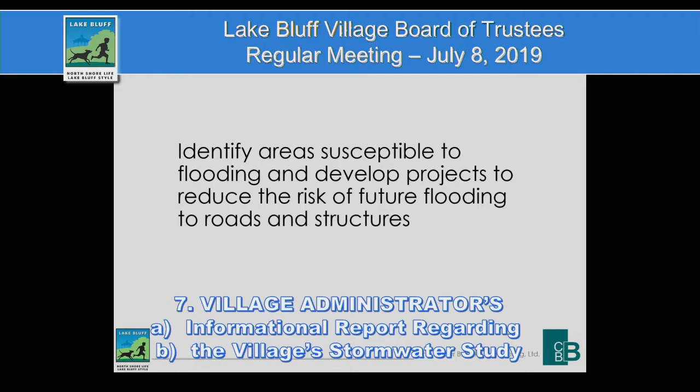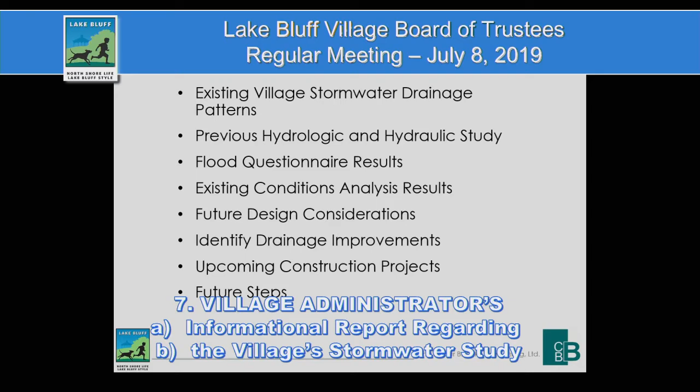So what I wanted to cover today was our existing village stormwater patterns, if you're not really familiar with how the water flows. I'm focusing mostly on the east part of town, from Green Bay Road to Lake Michigan. Here's a quick exhibit of our study area that we've been working on. The grayed out area in the bottom right corner shows our study area. The red hashed area shows what we've done in previous studies. I will be focusing from Green Bay Road to the east.

So in previous hydrologic and hydraulic studies that we've performed for the village, we sent out flood questionnaires to the residents and received pretty good feedback via the SurveyMonkey online website. Existing conditions analysis is what's driving what areas we're looking at within the village, and then how we're designing these study areas. The city has decent criteria that we like to follow and make sure that we're not causing problems and we're doing the best that we can to keep structures and roads clear. I'm going to identify a few drainage areas.

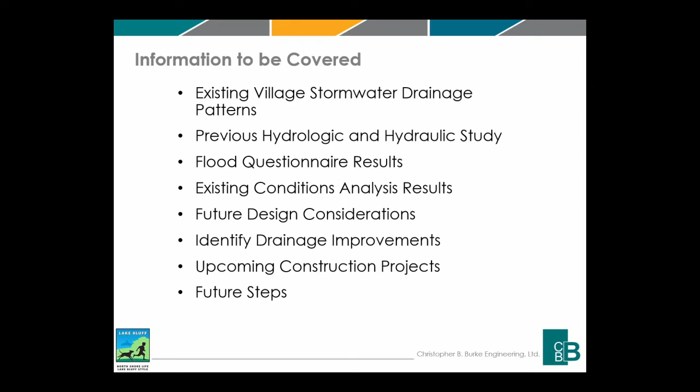In the future, I think we plan on coming back in September to discuss more specifics on the areas that we've pinpointed, and what kind of improvements and costs, and how we can decide what projects to move forward with. And then the village actually has a couple upcoming projects that are starting relatively soon. Within the next couple weeks, I believe, 2 stormwater projects that we're involved with are going to get constructed, and then what lies ahead for the future of the village-wide stormwater study.

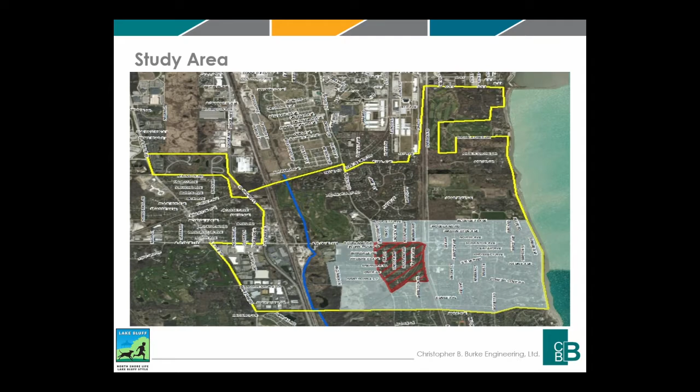So as I mentioned before, our study area focuses on the southeast corner of this map. We're covering from Green Bay Road east to the lake, south to the village boundary, and north to Blodgett Avenue. So here's a nice map that shows the existing drainage patterns. As you can see, the red is the high spot within the village, and the blues are the low spots.

So we actually are in a unique position. A subcontinental divide exists within our village, which is kind of neat. Everything that falls west of Green Bay Road will find its way directly to the Mississippi River. Everything that flows east will flow its way out towards the St. Lawrence waterway. So it's a neat little area from a hydraulic standpoint.

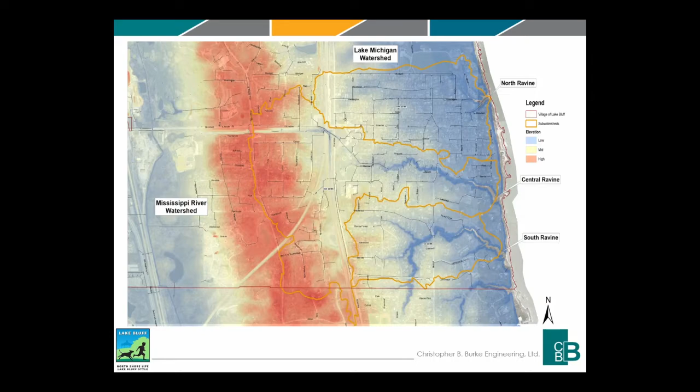What that analysis really helped us do was identify some future drainage improvements within the north and east terrace areas, which I'll touch on more. And I make a little note of it right below that, where we used that study to develop the Lincoln Avenue drainage improvement, West Sheridan Place improvements, and then that analysis has actually been expanded to include the village-wide study, so areas east of Sheridan Road towards the lake, and then south towards Bath and Tennis Club.

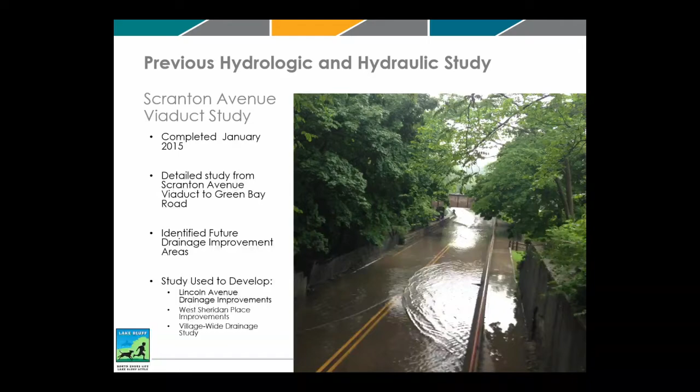So we sent out flood questionnaires to all of the residents. We put a link in the weekly newsletter. We put a link on the village website. The village mailed out information cards to residents to try and get responses. 329 responses were received, which is actually a pretty good showing. We've sent out to villages 6 times the size of this and received a quarter of the responses. So it's good to know that we're getting feedback. Really, the more information that we can get from the residents, the more knowledge we can gain.

I live in the community, and the number of times when it starts downpouring and I hop in my car and try and see the flooding, I can't even capture it all in one day. It happens so quick and it recedes relatively quickly, but usually by the time you get to a lot of spots, it's gone and there's nothing to really see.

So a couple questions that we asked, and we're really just trying to find information on, 1, the structure, and 2, what kind of flooding are you seeing and encountering? So about the structure, do you have a basement? Have you done anything as a residential flood control project, such as putting in overhead sewers to try and prevent sanitary backup? Do you have an exterior backflow preventer so the storm sewers can't surcharge back up into your floor drains? Relative questions like that were ones that we were asking.

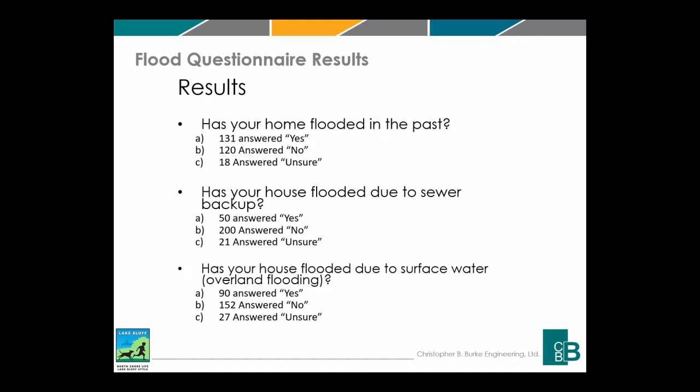So here's some of the responses that we got for homes flooded in the past. Almost 50% yes and 50% no. And then some of the questions on things that are happening outside the house. Is there a sewer backup that you're seeing? Is water coming in over land due to inefficient overland flow paths? Are you seeing ponding in the roadways? Is your road becoming impassable? Questions that help us, when we look at the overall village analysis, determine these pinch points, and confirm from the residents what they're seeing when it rains in excess.

So what we did was we created a survey response map. We were able to put together all of the responses in a GIS database and generate a map that shows where the problems are that we're seeing.

What's the kind of problems that we're seeing in those areas? And are these areas that we need to look at a little further? So here's the three main subbasins that kind of drain to the three ravines that go out to Lake Michigan. The North Ravine covers just a little south of Center Street up towards Blodgett. The Central Ravine actually has the largest watersheds, a couple hundred acres of tributary area, drains west to east. This is what is mainly tributary to the Viaduct before discharging under Artesian Park and into that ravine.

And then the South Ravine, which is I believe more of a newer developed area. They have the one South Ravine that picks up a portion from north of Lake Forest High School, drains up under Sheridan Road, and then kind of east towards the lake. So these are the three watersheds that we found based on the existing storm sewer systems that we were able to divide the community into.

So if you could see the black lines that are in the background, you probably saw it better on one of the earlier maps, and we'll see it again in the future. Those are some of the larger, what we call trunk lines. They're probably 15-inch minimum is what we picked up. There are smaller lines that drain through low spots, through no low spots, through rear yards that we didn't show on this exhibit, because if we did, it would just be kind of messy, to be honest with you. There would just be a lot to look at and probably cause some confusion.

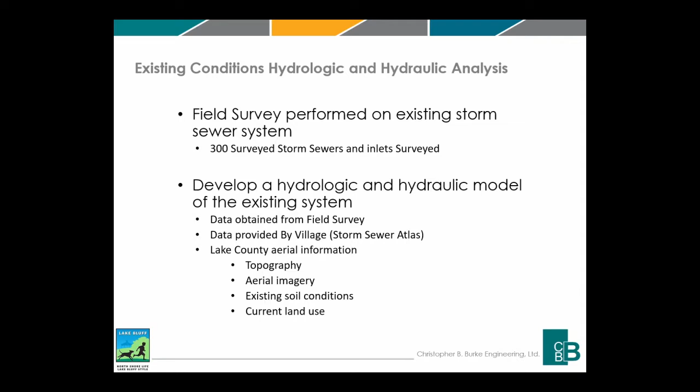So to give you an idea, we took those three subbasins and we broke them into 125 smaller subbasins. So this is what the skeleton of the hydraulic model looks like for the village. As you can see, a lot of the orange divides stayed consistent, the outfall stayed consistent, but what we were able to do by building such a large model is use more of a holistic approach to identifying any sort of problems within the area.

And then when we go and work on our alternatives, we're actually able to take a look and say, okay, if we fix this drainage issue in East Terrace, is now the viaduct going to have problems? Or are we now causing problems in the ravine by increasing storm water that's going there? So we're able to view it larger than if we just look at a smaller sample and say, yeah, this matches, we assume that there's nothing else. We wanted a better idea, and it's actually a way to feel more comfortable with what's going on and what alternatives we are proposing.

What's really nice about this is we are actually able to run our design storms from the Illinois State Water Survey. They provide us with these rainfall depths that we use to analyze, and then we're actually able to run various storm events that we see. So say for example the July 2017 event, I know it happened a couple years ago, but the event's probably still pretty fresh with a lot of people because that was probably record flooding throughout the county.

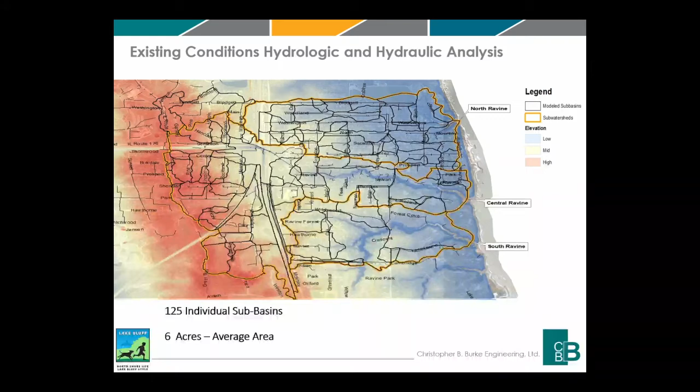But if you look over towards the East Terrace area, you're going to see smaller subbasins divided usually by roads, front and rear yards on how water divides. And that's how we were able to determine these divides, based on the Lake County aerial topography that we were provided with.

So what did we learn? We basically learned what we see in a lot of these communities in the area. This village was developed prior to modern stormwater planning. Lake County's ordinance didn't really come into effect and start taking off until 1992, and by that point, a lot of the village had been developed, obviously. So there's actually various levels of protection for the existing system.

So taking a quick look at things, the viaduct is going to flood if you have a real heavy rainfall that exceeds the 1-year rainfall event. That's just how low it is; there's inadequate drainage from it. There's a lot of area that drains towards it, and it's very flashy.

In the East Terrace, you can go into some of those areas, and some of the storm sewer systems will provide less than the 5-year. There are some larger ones, and based on design storms and what we use to determine those numbers, there's a little bit more protection. But then you can go to areas east of Sheridan Road and within the northeast portion of the community, and you see that there's almost the 10-year level of protection. So it's not consistent throughout the community, which is very common for communities that were developed in the past.

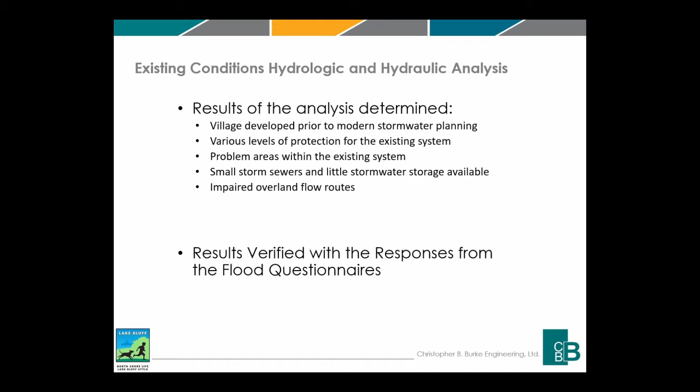From our results, we're also able to determine what problem areas we're seeing, and what is causing those problems. Is it inadequate storm sewer? Is it an impaired overland flow path, where if this shed wasn't built in this backyard, would water be flowing freely? If this fence wasn't put up and blocking water, would we still be seeing these issues? So we're actually able to see that. Then we were able to take the results of our analysis and compare them to the results from the flood questionnaires and the feedback we were receiving.

So here's a quick image showing our 10-year rainfall event and our 100-year rainfall event in the areas that we were seeing as flooded within the community. The blue is our 10-year, our red is our 100-year. Ideally, our goal is to get rid of as much of that 10-year sitting on the roadway as possible. You can see it prevails mostly in the East Terrace area. But there are some wetland areas that we're not going to try and fix, because they're supposed to take water. They're supposed to be those natural depression areas.

And you can also see more along Prospect on the east side of town, where we're seeing some 10-year within the roadway. So this helped us identify different areas within the community that we should take a closer look at. And everybody knows the viaduct problem. You can see blue and red through there pretty clearly.

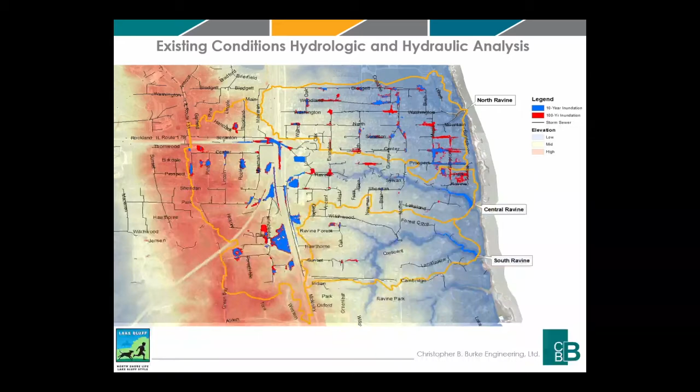There was some sump pump failure, so that was kind of an isolated event. But you're able to identify where you're hearing from these residents and what we're able to see. So it shows that our results are going in the right direction, and we feel comfortable designing alternatives to improve these areas based on the results of our analysis.

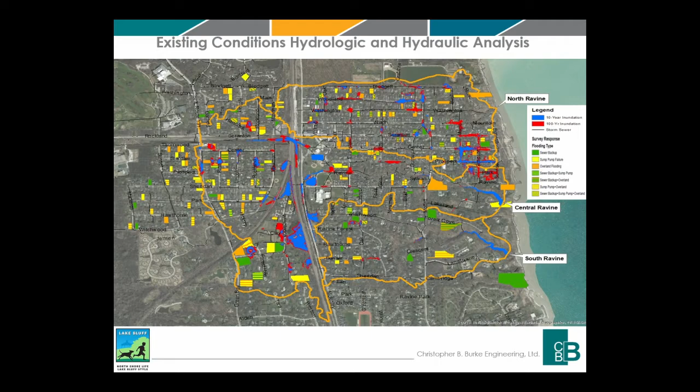So what are we really looking to do then? Our future design considerations, as I touched on earlier: the village has some design requirements that I think are really good for what we have. Like I said, limited area for the construction of storage basins. What the village likes to do is keep 10-year rainfall events off the road and 100-year rainfall events away from the structures. A 10-year rainfall event is a 10% occurrence chance each year.

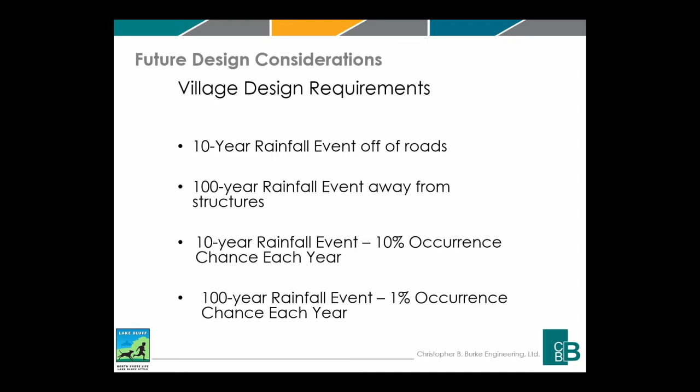We've had about 4 100-year storms in the last 3 years. Believe it or not, there's only supposed to be a 1% chance of that happening in a given year. So we're seeing it more frequently, which is leading to this, and this is what we're considering when working on the proposed conditions and our alternatives.

The Illinois State Water Survey, based out of Champaign, Illinois, analyzes and re-looks at rainfall depths after so many years. They've been hearing from a lot of communities and regulators saying your rainfall depths aren't really aligning with what we're seeing. So those depths are currently being updated.

We're now going to start seeing a skew where, currently within Lake County, a 10-year, 2-hour rainfall event is 2.25 inches. What they're looking to increase it to is 2.99 inches, about a 30% increase. If you look at where 2.99 falls right now, that actually falls between the 25 and 50-year rainfall event. So that gives you an idea of the level of protection and the skew happening with rainfall depths.

Communities, regulators, and engineers need to adapt and design for some of these future increases, because what's the point of putting a project in the ground right now, designing for standards that are going to be outdated in a couple months?

The 100-year, 2-hour rainfall in Lake County is 3.77 inches, and it's moving up to 4.97. I didn't even have that number on my chart, so I couldn't tell you exactly what that falls to, but it's well over the 100-year, probably not far off from the 250 to 500-year range. So that's the kind of skewing we're seeing.

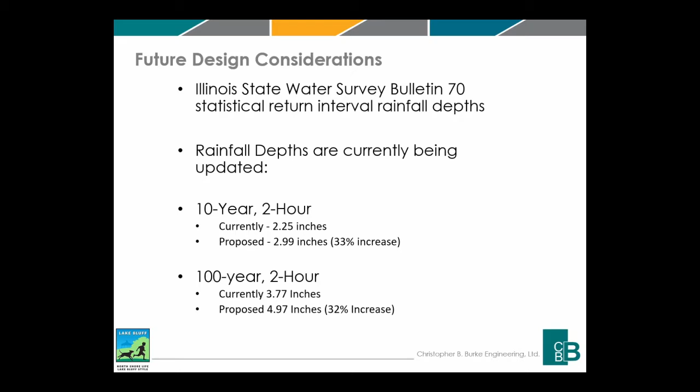Our potential drainage improvements are based on the results of the analysis, developed and analyzed at a conceptual level right now. When we get more into the design and planning phase, we'll take more site-specific survey and refine our modeling based on what we shoot out there with a field crew. That's when we prepare plans, and when looking at all our future concepts we'll start using the new rainfall depths. Like I said, we want to be progressive and make sure this stormwater system functions for years to come, not just for the time being.

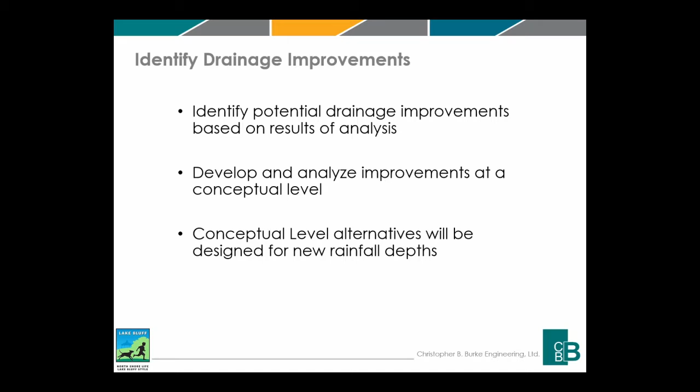Based on our results, similar to the map I showed you earlier, we were able to identify 6 different study areas. Study area 1 is over in the East Terrace. Study area 2 is down near Ravine Forest. Study area 3 is over on the east part of town. Study areas 4 and 5 involve the viaduct, and we're looking at a couple different alignments on how to drain it.

That really comes down to constructability, cost, and minimizing impact. Study area 6 is the area in the north center, where we're looking at constructing more of a relief sewer through that area to try to keep the roads clear and keep structures free from damage.

Here's how we're going to look at some of these alternatives. We're going to analyze using the XP-SWMM model, the stormwater management model, and look at both conveyance improvements and, if possible, storage improvements. If there's land we may look into doing it, but a lot of the land doesn't provide the volume necessary to offset the storage that would be needed.

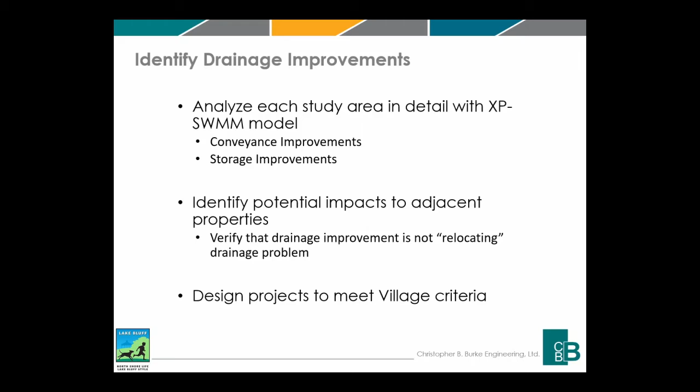We're going to identify potential impacts to adjacent properties, like I mentioned earlier. By looking at it through a whole village-wide study, we want to make sure we're not moving the problem on Pine to Rockland, or moving the problem on Rockland to the Viaduct. By looking at it from a village-wide analysis, we're able to see if we're causing problems somewhere else.

Are we creating a new problem that we wouldn't have known in the past? And then, as I mentioned before, a lot of these projects are going to be designed to meet the village criteria of 10-year off the road and 100-year away from structures.

I wanted to touch on a couple upcoming projects starting within the next couple weeks, which came from the Scranton Avenue Viaduct study wrapped up in January 2015: the Lincoln Avenue drainage improvements and the West Sheridan Place drainage improvements. Both involve construction of storm sewers to drain low spots and keep roads and structures clear. Here's an upcoming project at Lincoln Avenue and Hancock Avenue, just north of Scranton — I'm sure quite a few people are familiar with the area. This is a very, very low spot.

What ends up happening now is the existing storm sewer, shown in red, picks up this area and drains it east through the rear yards before picking up Rockland Avenue and bringing it down into IDOT-owned land. What we're looking to do is install an entire new pipe with high-capacity inlets at this low spot to pick up all the runoff coming down Hancock and Lincoln, and run it directly under Scranton to the same ditch it goes to now — we're just going to discharge it a little further upstream.

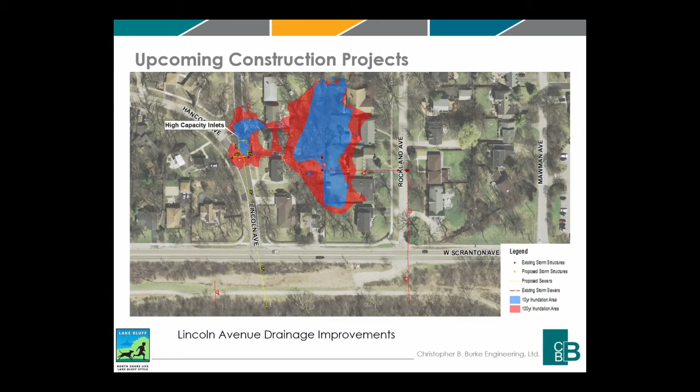The second project kicking off soon is the West Sheridan Place drainage improvements. There are a few low spots that exist now — one right on the road at Sheridan Place, and rear yards that fill up and are drained, I believe, by a very inefficient pipe. What we're looking to do is increase the storm sewer capacity down Sheridan Place, down Lincoln Avenue, and down Park towards Malman Park, then connect to the existing system and discharge into the existing flow path.

So we're able to look and see, all right, if we pick up this water, are we causing any additional issues down here? Based on the timing of how the storm water is running off, we were comfortable and confident that we weren't going to be pushing problems downstream.

So what's in the future? Really what we're going to look at is identifying opportunities for village infrastructure projects and residential flood-proofing projects. The most we can do is work with the village to give them ideas, plans, and thoughts on how to improve areas where they can.

Obviously once you start working on private property, you're getting into a gray area, and a lot of communities leave that up to the individual homeowners. So that's what we're going to look at — what we can do to create a more regional project rather than smaller projects that just slap a Band-Aid on it, I guess you could call it.

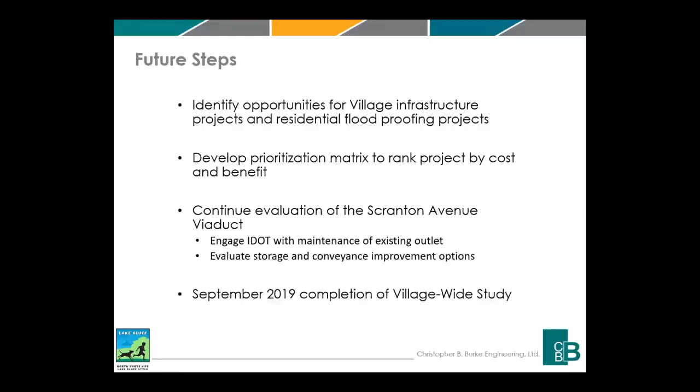In September 2019, we're looking to complete the study itself. By that point we'll have a report and some exhibits, giving a better discussion on what the individual study areas are, and as I mentioned before, we'll put together a prioritization matrix to help the village understand the benefit of the projects we're proposing.

So, if there are any questions, I could take them now — or I'll open it up to the board for questions.

Did we recently look at, there was a fanciful project a number of years ago of digging a whole new sewer line from there all the way down to the lake to help cure the viaduct issue? What was the cost estimate of that? Twenty million.

And part of this study is to look at that window of things less than that. Is there a 10 million, 5 million, are there other projects that can achieve the village standards but may not be that deep tunnel project? I've told a number of people about the deep tunnel project, because the first thing they say is, well, let's just route it through the ravines - we know the problem with that.

Then there's this other thing, and I wanted to make sure my number was still right and hadn't drifted. Actually, it's only slightly less than that - something like 18 million - so it continues to be just out of the question. So that provides context for what you guys are looking at.

Can you bring back up that exhibit that shows the east side? If you look at that study area, some of the conversation related to that was: if there's a pipe solution, can you pick up some of those other neighborhood sub-projects and capture that too, to have that kind of one big cure? Is there one pill, if you will, that could cure this problem?

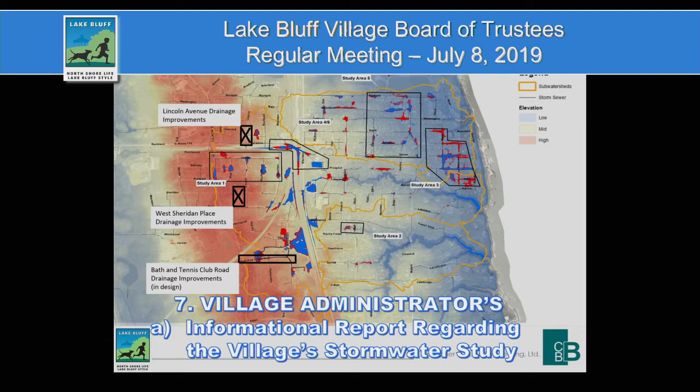And then another question, that particular project to which we have referred, what relief, if any at all, does it bring to houses? Again, it would depend on the ancillary projects that we could connect into that same piping system, have trunk systems that would feed into it from other areas. The geography of it, if I remember, it was going to go down North Avenue. That was the original alignment, yeah. Yeah, so that you could pick up study area 3 and maybe even study areas 4 and 5, just where you can tie in. It did offer solutions to improve a number of properties to get to the 100-year standard and keep water from infiltrating the homes.

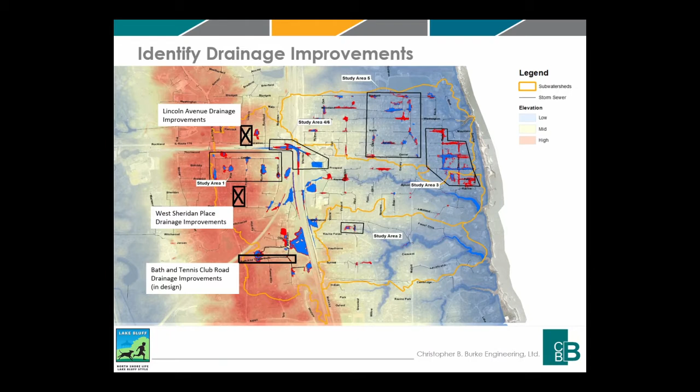And then another question, somewhere I heard that at some point Jawa has to do another feed pipe. Is there any coordination, if that were to happen with a big rip-up of one street or another, of that being a possibility to incorporate into the solution here? Yeah, Jawa is talking about doing another straw into the lake. But I don't think at this time we're talking about running a new pipe down Blodgett. Their second inlet to the lake would be just from their pump station to the lake. They might want to do a redundant line beneath the railroad tracks at the end of Blodgett, just for reliability purposes, if they have a problem with their pipe. But right now, they're not looking at a whole new pipe down Blodgett.

But obviously we look for any partner we can find, right? Yeah, well, I'm also thinking about the opportunities to one and done, shall we say? Yep, right, minimize disturbance. Yeah, and minimize the expense. Right. Dig it once.

Any other questions? I was just wondering, I know you said the study will be done in September this year, but the two projects you highlighted, Lincoln Avenue and West Sheridan, do we have any kind of a timeline on those, when they might start? These two right here? I think if you go forward. Yeah, this project and the Lincoln and the Sheridan. Yes. That's Jeff. He's been involved with those and probably has more of an understanding of what's going on.

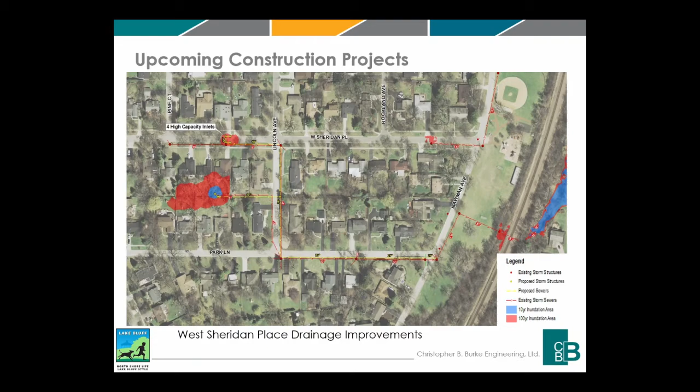Those two projects are under contract. The first day they were allowed to work was today. We put them off to after the 4th of July. We'll probably see them start on West Sheridan in the next week or two. Okay. Lincoln, we're still waiting for an IDOT permit, which we expect soon to get that project kicked off. First thing you'll see is some tree removal, and then they'll get moving. Thanks. We had a pre-construction meeting, and they said they would need every bit of the contract period, which I believe is into September. But those will be done this summer and early fall. Those projects will be completed.

Thank you, Jeff. Any other comments or questions for anybody? So, this was part 1 of 2 in this great series on stormwater in the village. We wanted to have it at this meeting, one, because it's televised, and if somebody wanted to review it later, they could do it, versus doing it at a committee of the whole meeting. But also, we kind of purposely put it around a very short agenda so that we can spend most of the time having this conversation.

So do appreciate Scott coming and sharing. We'll see more of him. Yeah, thank you. We appreciate this. Thank you very much.

All right. Do you have anything else on the village administrator's report this evening? No, ma'am. No, okay. Village attorney's report. No report tonight. No report. Why am I not surprised?

Village president's report. We had an absolutely fabulous 4th of July parade. The weather was great. It really helped a lot. Not quite sure how many thousands came, but they did come in thousands. And a great time was had by all. I don't think there were any major incidents for the thousands of people that were here having a good time. So we appreciate all of the volunteers and the hard work that puts it together, because basically they're now already starting for next year's. One goes and it starts over again. So much appreciation to everybody for this, and kudos.

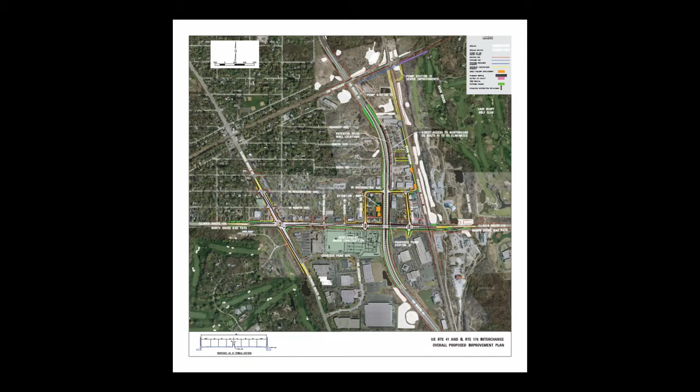So it looks like, for the longest time, we said it would not be within our lifetime. Should we worry? But it looks like it's going to happen, so that's good news. Yeah, and there will be some disruptions. Some, yes. Minor. Quite a few. Okay, thank you. Anybody else have any questions to Jeff or anybody else on this?

I was just curious if there's ever been any talk on, and this is a little off the subject of 41, but that railroad line that comes through, you know, when a train comes through and we get way backed up, if there's ever been any talk of doing a viaduct and having the road go over or under so that it flows.

Yeah, I believe that was looked at as part of phase 1, with 176 already going over 41. Logically, you think the rail would have to go down as well and follow 41, but the amount of miles you'd have to go back to get that grade to go down 20 feet and come back up, it's just too much. The cost would be closer to the I-80 project if that was a part of this. Better for an overpass over the train. And even that, with the way we are fixed right now with 41 under 176, that's hard to do as well. Okay, thanks. Anything else? Thank you, Jeff.

Okay, that's that. Let's go back to the acceptance of correspondence. All correspondence was delivered to the Village Board of Trustees in the informational report on June 21st and 28th. That's all part of the consent, yes, excuse me. And that also includes the second reading of an ordinance approving a final plat of subdivision and variations from the zoning regulations for 454 Simpson Avenue, 617 Prospect Avenue, and also the second reading of an ordinance granting a variation from the village's parking setback regulations, denying a variation from the village's front yard regulation, and approving a site plan at 101 Waukegan. Do I have a motion to accept the consent agenda? So moved.